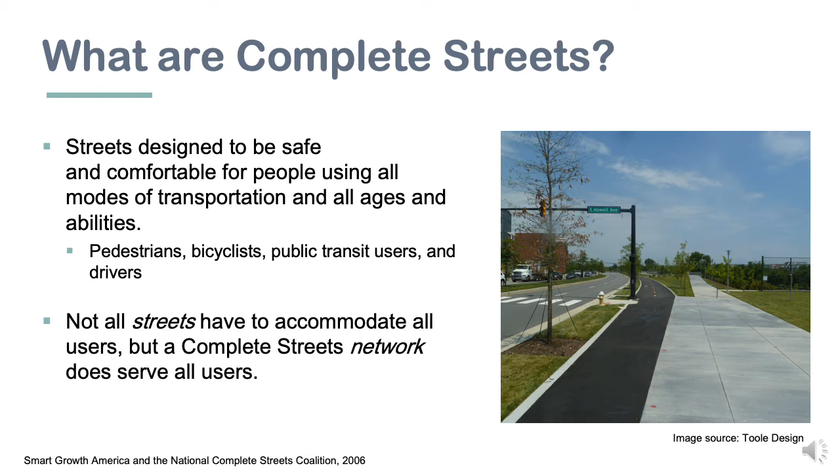Towns, cities, regions, and states make formal commitments to complete streets through adopted complete streets policies. These documents typically include many, if not all, of the 10 sections recommended by the National Complete Streets Coalition. There are at least 10 municipal policies in Connecticut and a state law and ConnDOT policy committing the state to a complete streets approach. Toole Design and FHI have recently worked with the Capital Region Council of Governments on crafting a policy for the Hartford region.

Since the concept of complete streets was coined about 20 years ago, there have been over 1,400 complete streets policies adopted or approved nationwide.

So complete streets include pedestrian improvements like sidewalks, crosswalks, curb extensions, and curb ramps that help people with disabilities navigate the street. They include improvements for riding a bike, like bike paths and bike lanes, and they can include improvements for transit, such as bus stops and shelters. Strategies for implementing complete streets include new construction, traffic calming, and travel lane reconfiguration, which is sometimes referred to as a road diet.

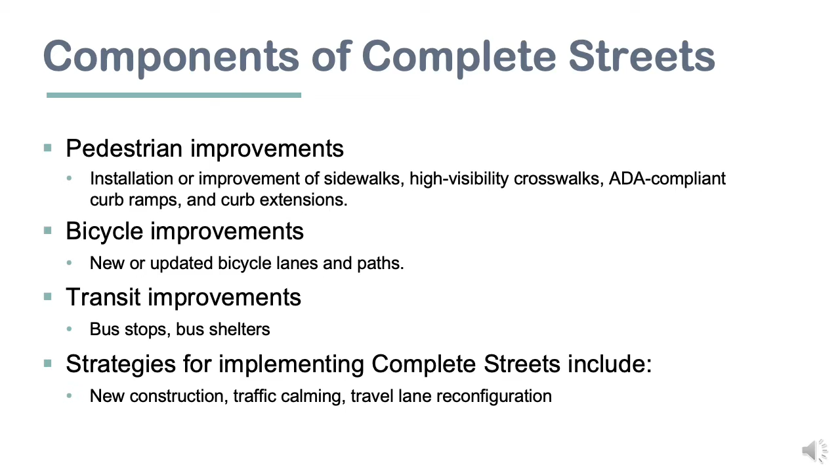This is a street in Swansea, South Carolina, population 827. At this point, the group in attendance offered their ideas on how the street could be designed to feel more complete. So this is the before image. And here's a rendering that we did for the street. It includes many of the ideas the group thought of, like new street trees, curb extensions, and wider sidewalks, while retaining on-street parking. The design intends to make the street comfortable and accessible for people, no matter what mode of transportation they choose.

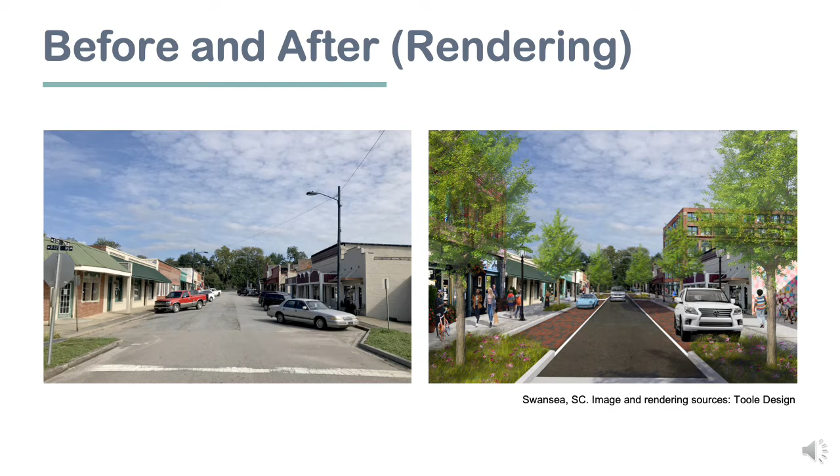So complete streets can help address public health and traffic safety issues in rural areas. Compared to the general population, the population in rural areas is older and has higher rates of physical inactivity, obesity, and diabetes. And rural areas experience fatal traffic crash rates that are disproportionately high relative to population.

Complete streets contribute to positive economic outcomes for rural communities. They expand travel choices, make it easier to spend less on transportation, and tend to have a positive effect on property values. Part of the draw of vibrant, traditional main streets in town and village centers is that they are complete streets. These are the kinds of streets that attract investment and visitors who spend money at local businesses.

Trails for people to walk and bike can draw visitors from around the region and even around the country. Those visiting overnight, usually using longer trails or trail systems, spend significant amounts on hotels and food and other items. This creates stable jobs in rural communities.

We can build complete streets that are sensitive to a rural context, considering surrounding land uses, travel needs of residents and other users, and other factors. You can adopt any number of complete streets design approaches depending on context, with a few basic examples shown here.

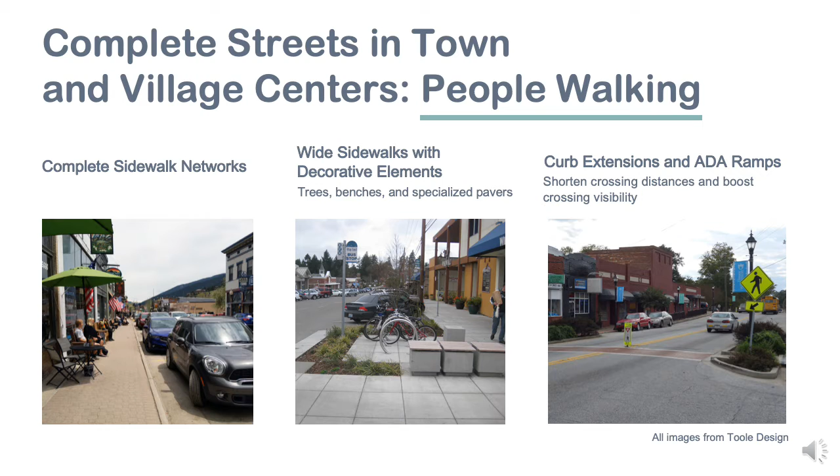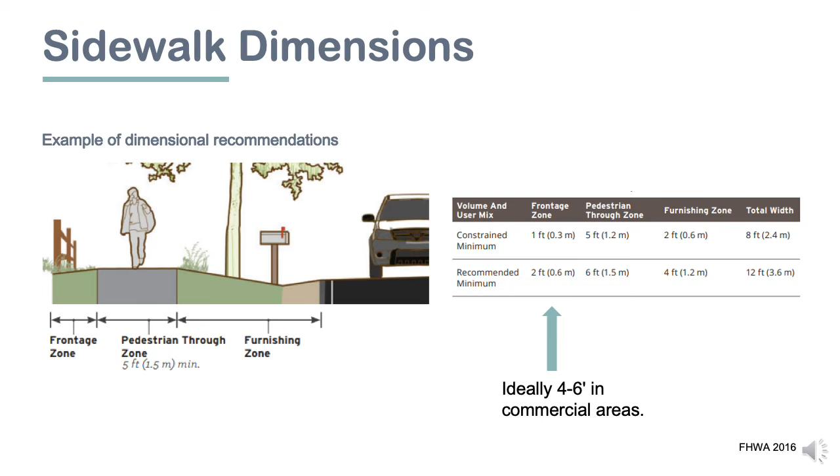Sidewalks are the basic building block of pedestrian comfort and safety. On this slide, you can see an example of dimensional recommendations for the pedestrian realm. Wide sidewalks, frontage zones, and furnishing zones provide increased comfort to users, and these are especially important and should widen in commercial retail areas.

So what about crossing the street? Well, high visibility crosswalks make it easier for drivers to see people crossing. Raised crossings also improve visibility while slowing speed, and curb extensions shorten crossing distances, reducing exposure time in the street.

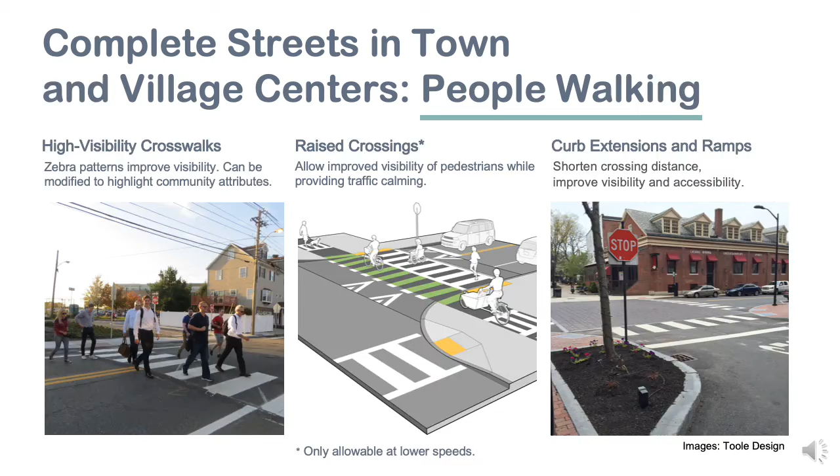When designing roads and streets that are welcoming for people to ride a bike, know that each street is different and has its own unique context. There may not be a perfect facility design, but by considering the factors shown here, among others, you can narrow down the range of potential options.

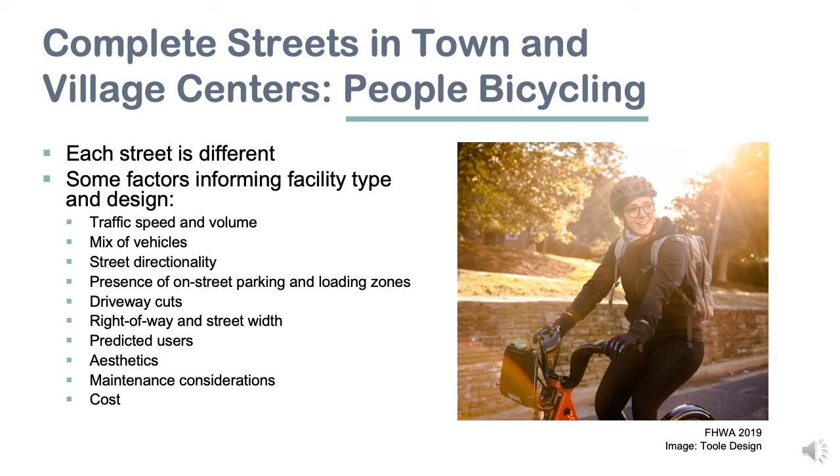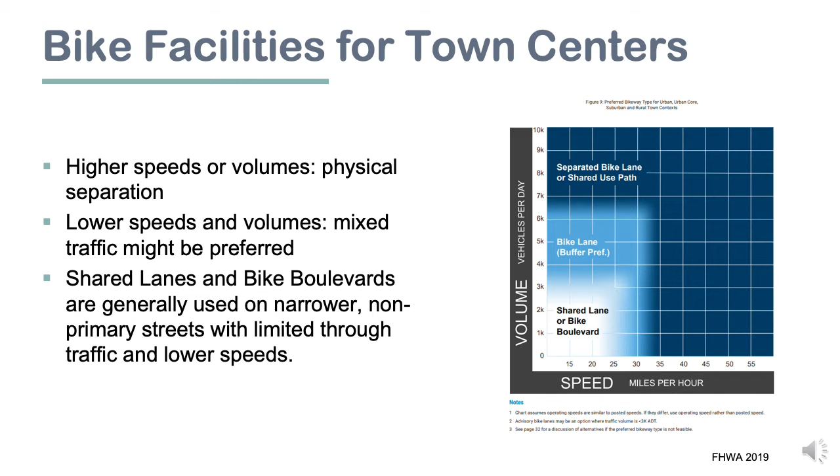A general principle to follow for all contexts, including rural town contexts, is to physically separate bike facilities from motor vehicle traffic at higher speeds or volumes. At lower speeds and volumes, people on bikes mixing with traffic might be preferred.

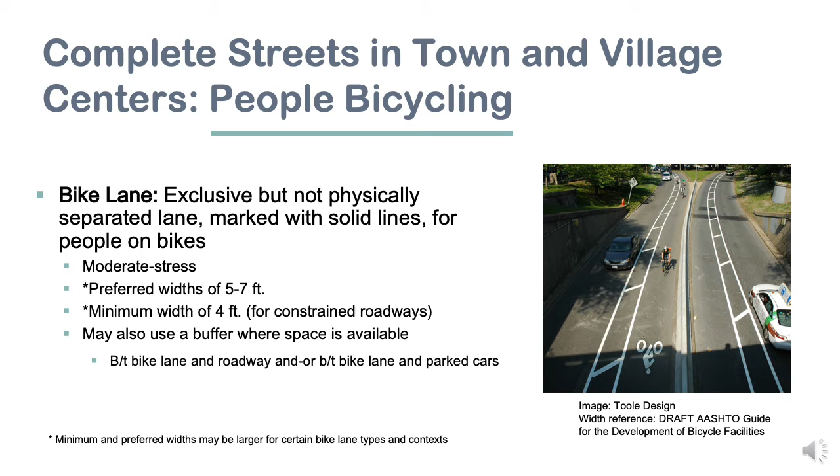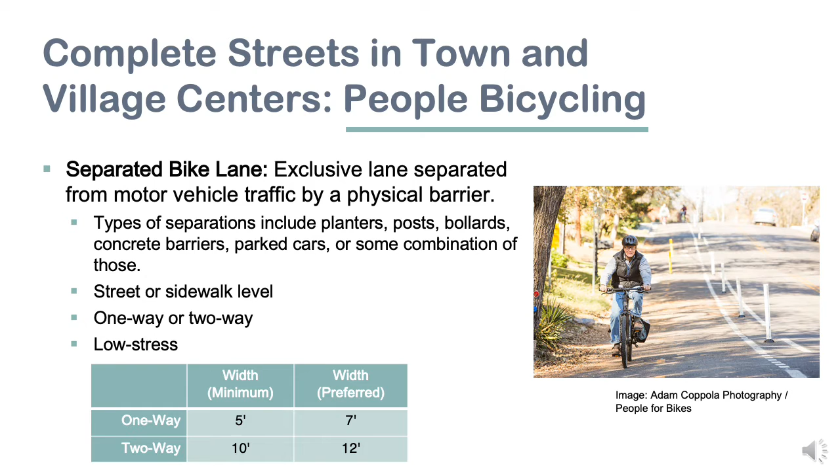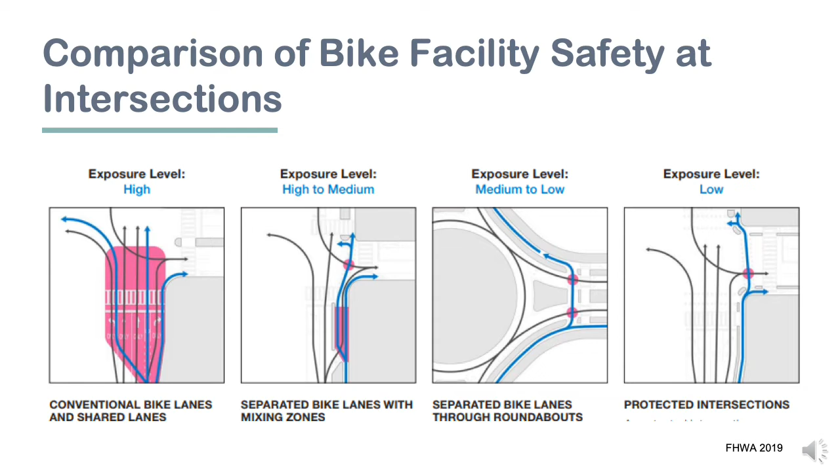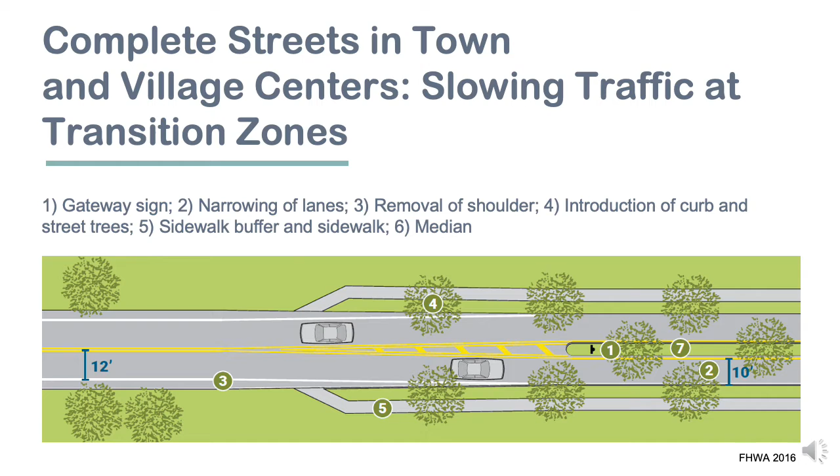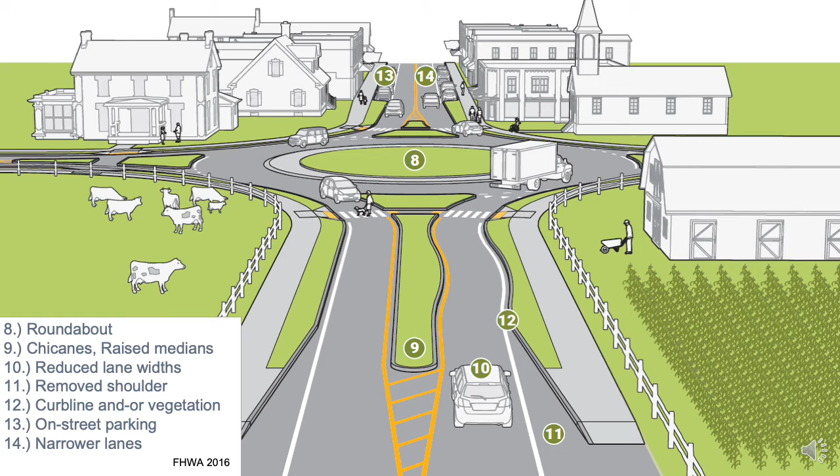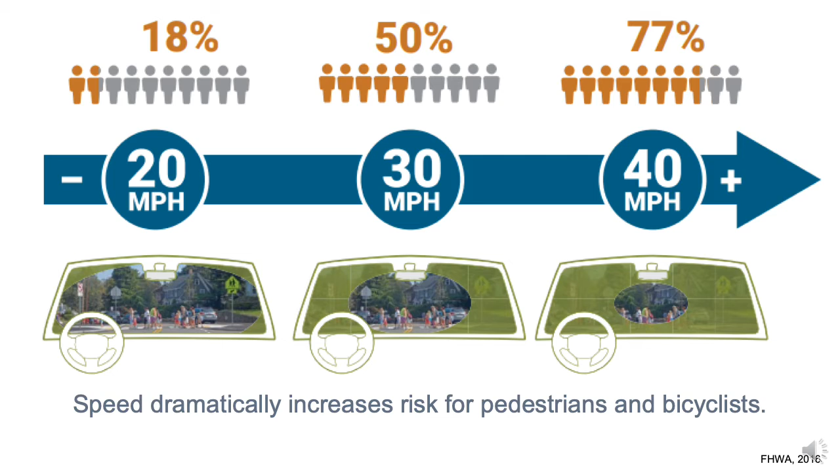Speed reduction is so important because the higher a driver's speed at the time of a collision with a pedestrian, the pedestrian has an exponentially higher chance of dying from the collision. When you drive at lower speeds, you also have a wider cone of vision to be aware of what's going on in front of you and along the side of the street.

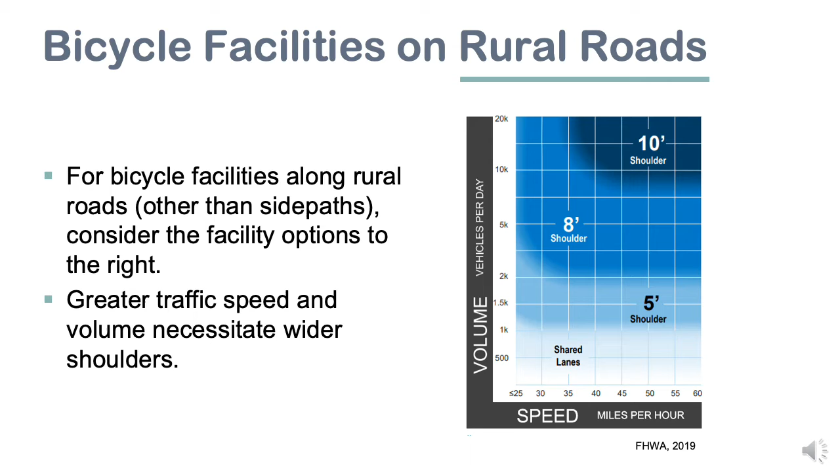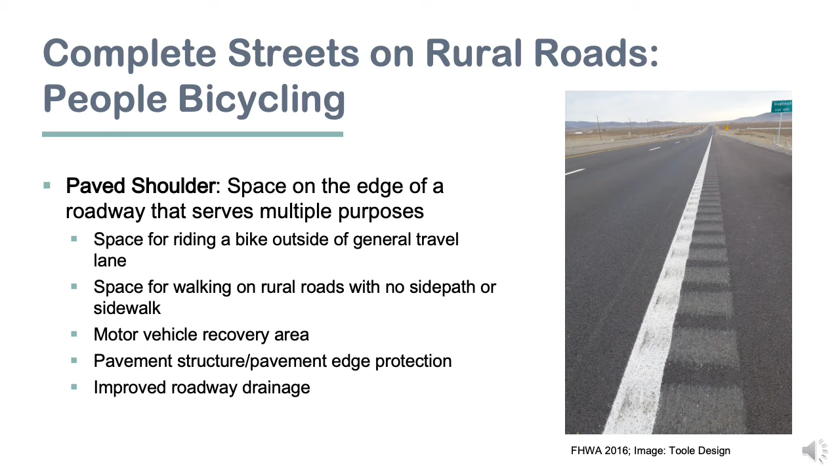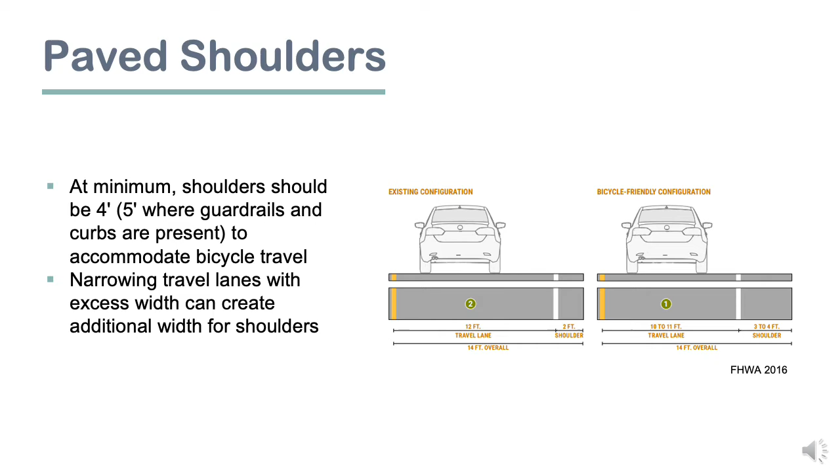Paved shoulders serve multiple purposes, including providing space for riding a bike and walking on rural roads without side paths, and serving as a recovery area for errant motor vehicles. At minimum, shoulders should be 4 to 5 feet to accommodate bicycle travel. If travel lanes have excess width, narrowing them can enable more space for the shoulder.

Trails are a familiar feature in Northwest Connecticut, and NHCOG has great information and maps on its website, so I don't need to say a lot here.

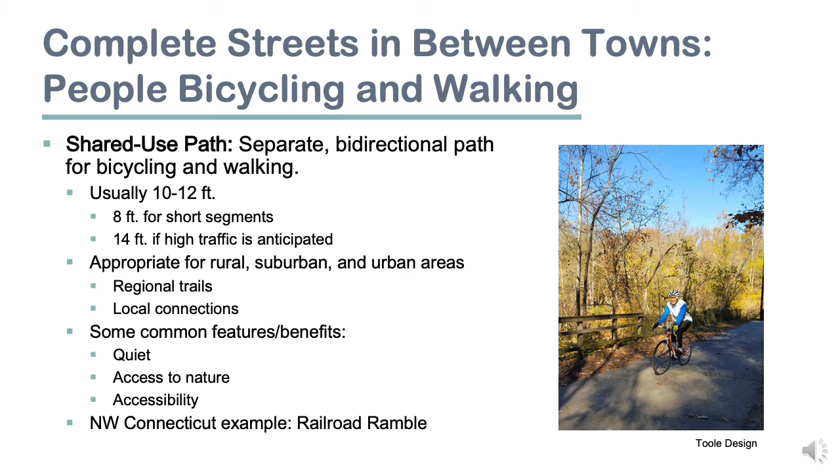Shared use paths are trails that are typically paved with asphalt or concrete or have surfaces such as gravel or stone dust. They are great for all types of communities, from rural to urban, with longer regional trails sometimes passing through multiple land use contexts. Trails tend to be popular because they are quiet, often accessible and usable for people of all ages and abilities. They often provide access to nature, they're free of motor vehicle traffic, and they provide an overall comfortable walking and bicycling experience.

Side paths are shared use paths built within the right-of-way, again providing a comfortable and low-stress walking or cycling experience for all ages and abilities, even on higher speed or volume roads due to their separation from traffic.

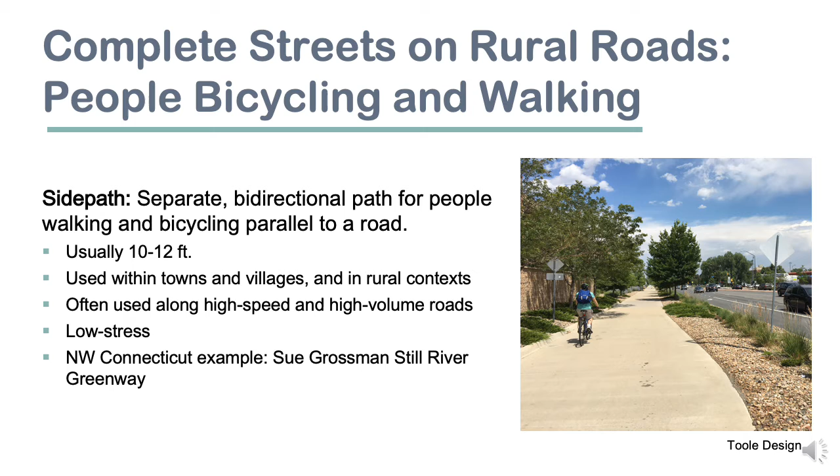Side paths should be separated from the adjacent road, ideally by 6.5 feet or more. Landscaping and trees can provide a greater feeling of separation while helping maintain a rural character.

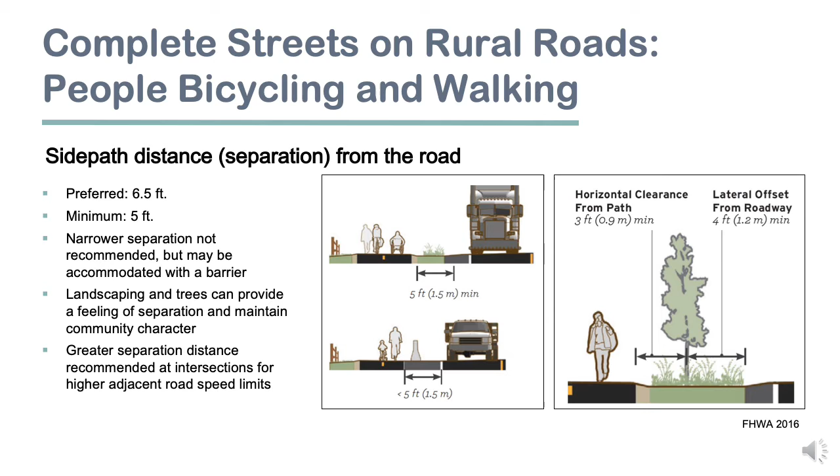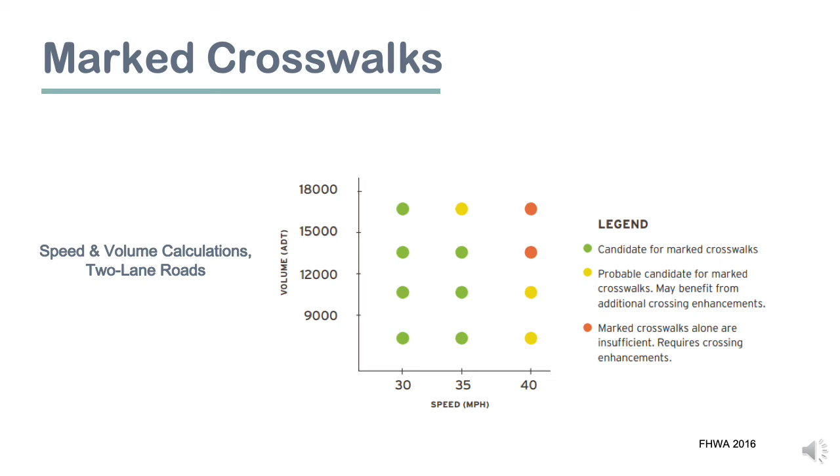Pedestrian crossing islands provide physical separation and refuge at the midpoint of a crosswalk, allowing for people to cross in two stages. They are a proven safety countermeasure and a potential strategy for enhancing crosswalks and shared use path crossings.

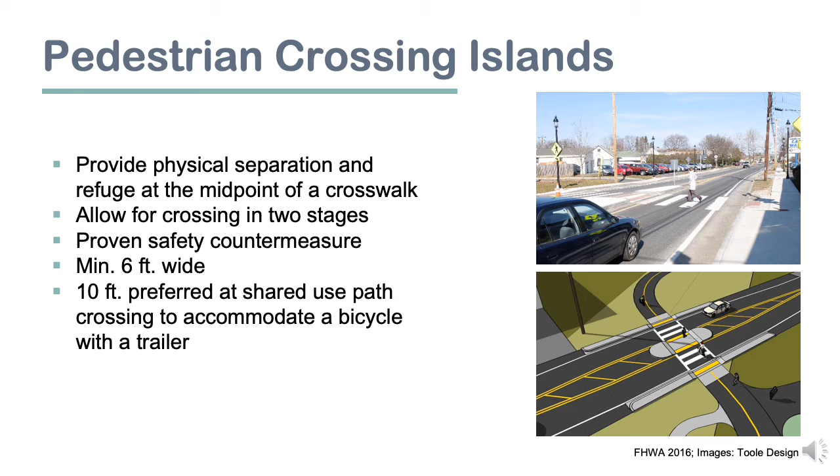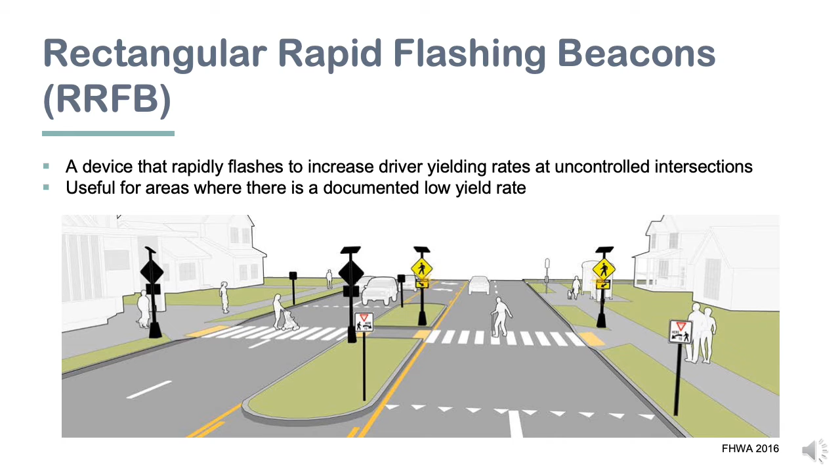Another option is the rectangular rapid flashing beacon, or RRFB, which is a device that accompanies the crosswalk sign and rapidly flashes to increase driver yielding rates at uncontrolled intersections. It's useful for crossings in areas where there is a documented low yielding rate for motor vehicles yielding to pedestrians.

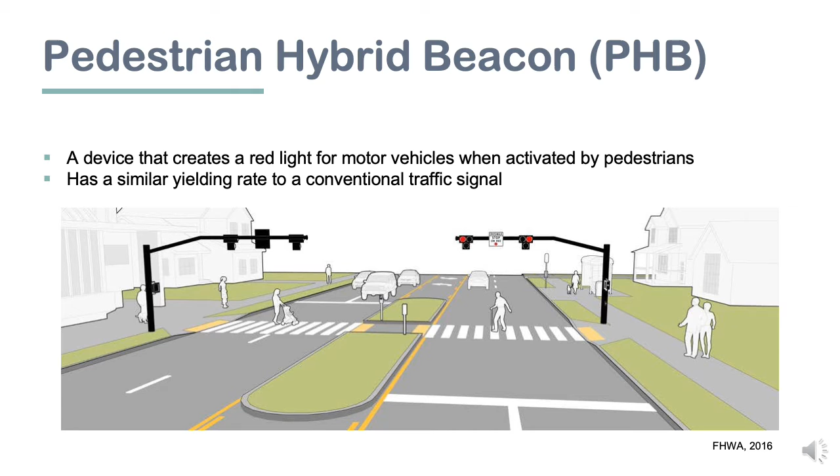For higher volume street or trail crossings, pedestrian hybrid beacons can be used to create a regulatory stop. They flash a red light for motor vehicles when activated by a pedestrian.

I would be remiss if I didn't mention wayfinding. It's so important for assisting people to navigate onto and off of trails and to navigate to destinations. It provides simple, concise messages to help people understand where they are relative to landmarks and popular destinations, and also creates a sense of identity for the community.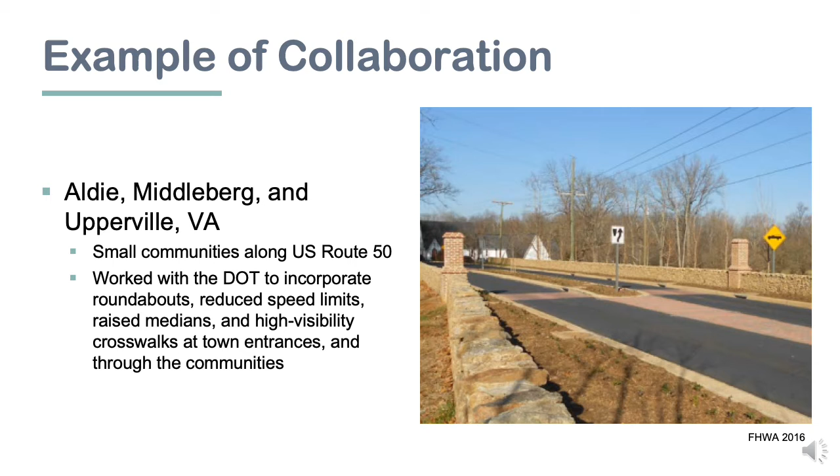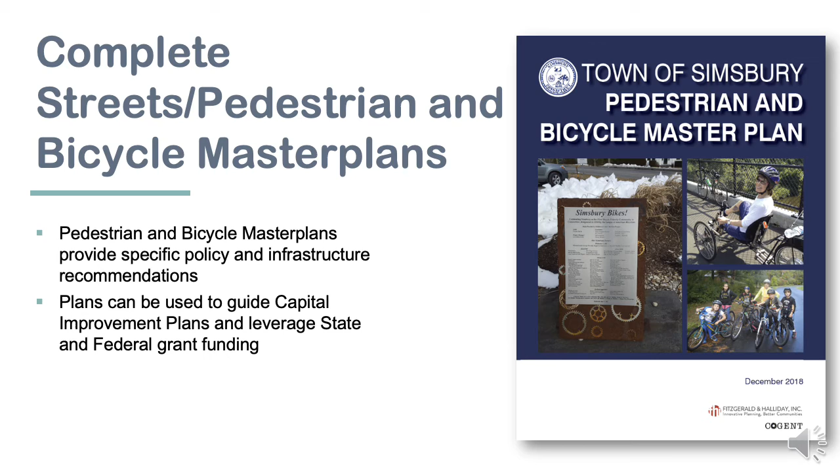What preceded the work that we did in Simsbury was the adoption of a complete streets resolution by the town. That resolution set forth in motion the work we did in the bicycle and pedestrian master plan, and provided some guidance as to how the town should go about planning for the maintenance and management of its transportation infrastructure.

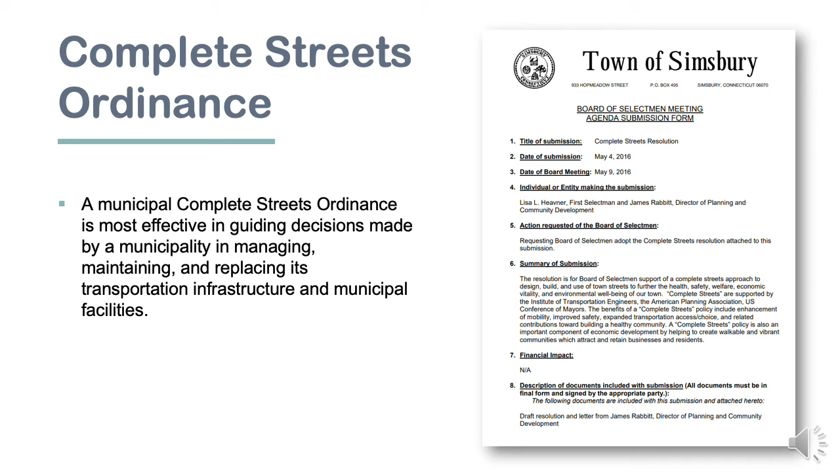In addition to complete streets policies, any community's zoning, design guidelines, or subdivision regulations provide an opportunity to provide regulations that encourage or require complete streets elements.

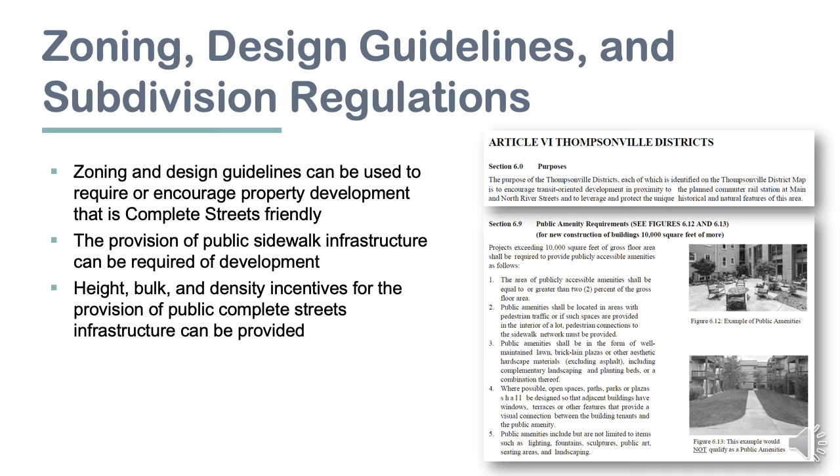Now I'd like to profile some examples of our work in smaller communities in both rural and kind of rural suburban contexts, the first one being Branchville Village in Ridgefield.

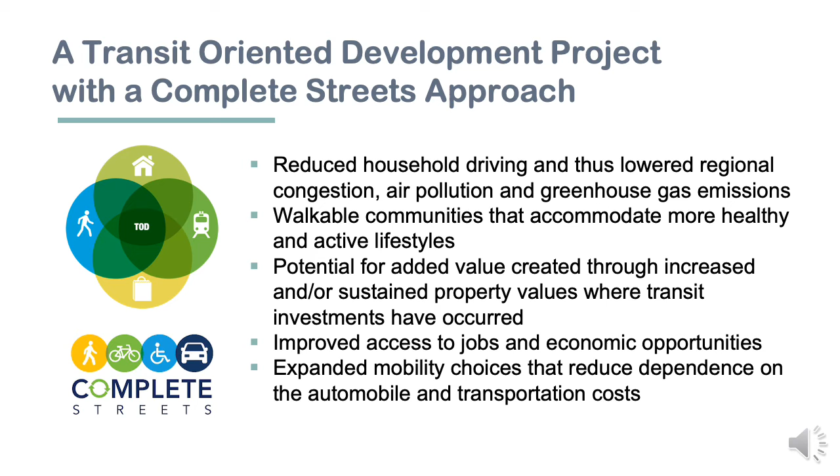The project had its origins as a transit-oriented development project, but we really took a complete streets approach, because that was the most noticeable aspect that would benefit transit use: providing much more robust pedestrian amenities throughout the village center. But there were additional goals of transit-oriented development: increasing transit use, stimulating economic development, improving air quality, and reducing traffic congestion. Complete streets play a role in all of this.

We started the project by establishing a vision, and within that vision, a well-connected pedestrian environment was really central to the concept. A little bit about the transportation network in Branchville.

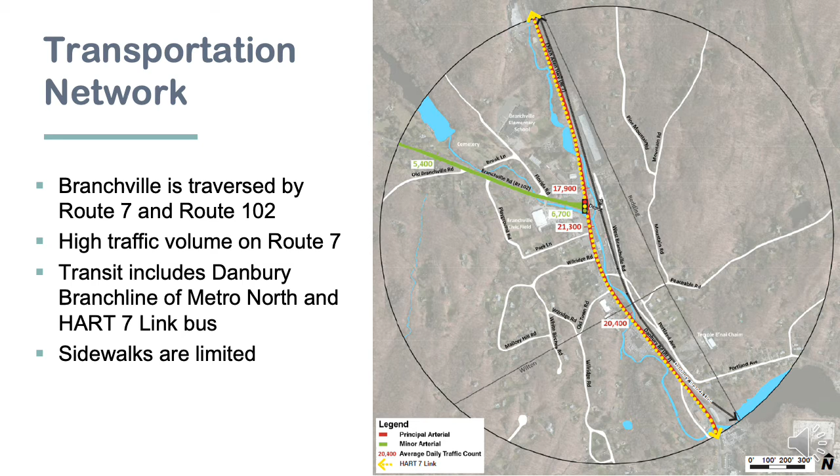It's the intersection of two state routes, 102 and Route 7. Route 7 carries more than 20,000 vehicles a day, Route 102 slightly less, 5,000 to 6,000. There's also the Danbury Branch train line running on the east side of the Norwalk River and the east side of Route 7. The area is also served by a bus. The headways are pretty far apart, but the HART 7 Link does travel north-south along Route 7 with a stop in Branchville.

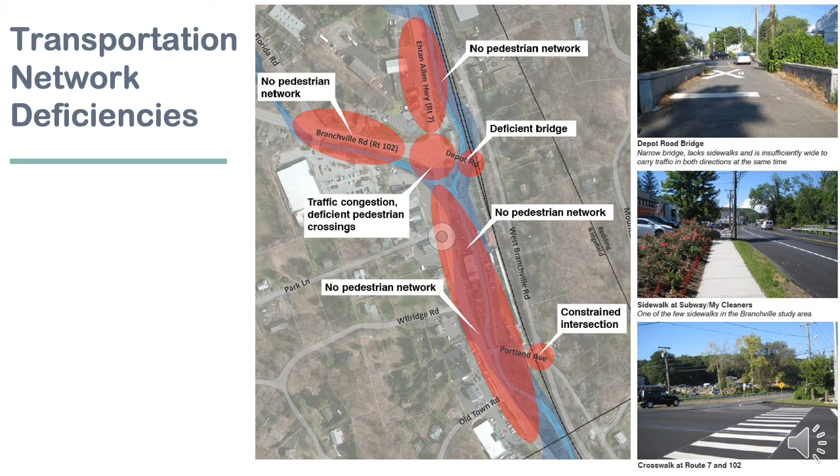Looking at the pedestrian and transportation network, we noted very quickly a lot of deficiencies. There were intersections that needed improvement, a lack of pedestrian network, and some old bridges needing work that did not have sidewalks. So a range of improvements were concentrated in proximity to the train station.

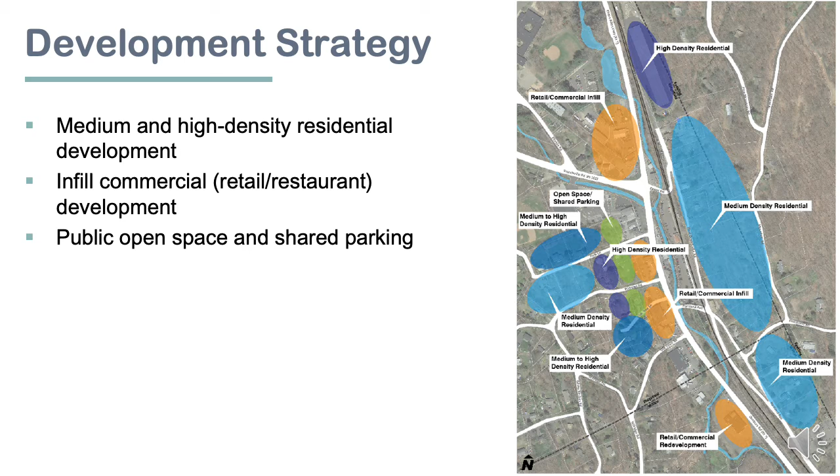We also provided the town with a development strategy—that's the development part of transit-oriented development. That included medium density residential, infill commercial, and mixed-use retail with residential, along with some public open space. The residential development we envisioned was medium density townhouses and apartment buildings with high quality design, compatible with the architecture in the area.

It's really this level of density that makes it easier to support more robust pedestrian facilities. First, you can get the developer to build these things out as they develop the properties. Included within that vision was more infill commercial, retail, restaurant, and service-based development to activate the area and bring it back to life as a village center.

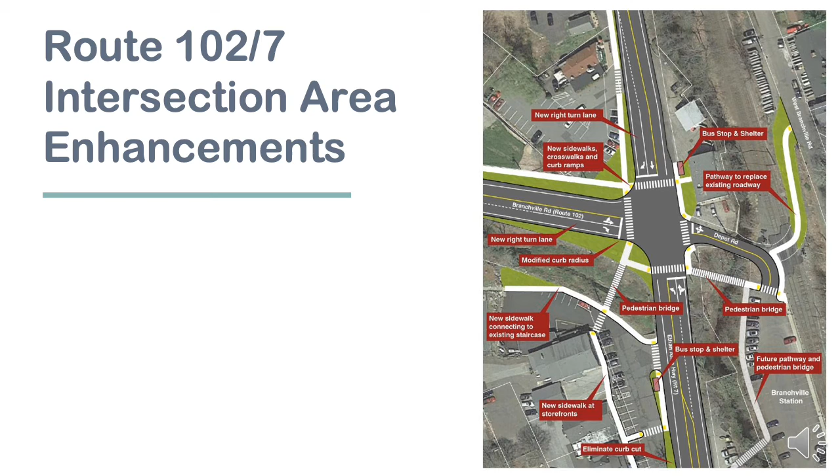The Route 102, Route 7 intersection was a big focus for us, as I mentioned earlier. We provided recommendations for far more complete pedestrian facilities in the area, including pedestrian bridges over the Norwalk River and some of its tributaries, sidewalks connecting to the train station and storefronts, shortened and more complete crossings at the intersection, along with a bus stop and bus shelter for the HART 7 Link.

This is a little further south in the project area, continuing those similar improvements down to the south side of the station, providing access to the station from the south as well.

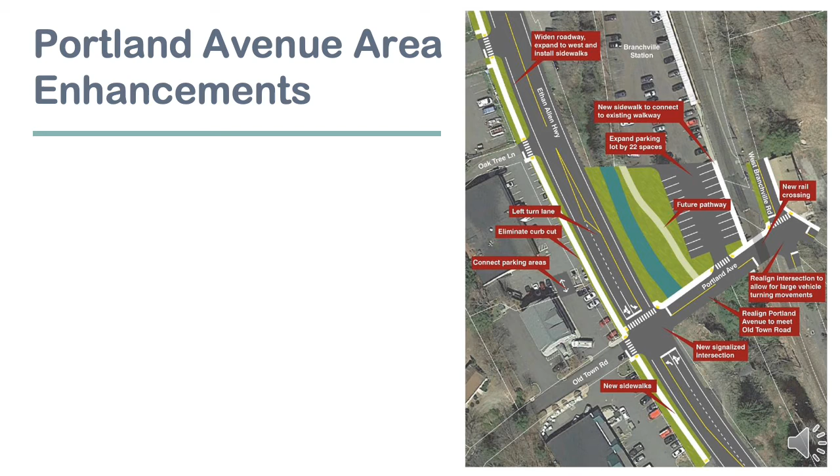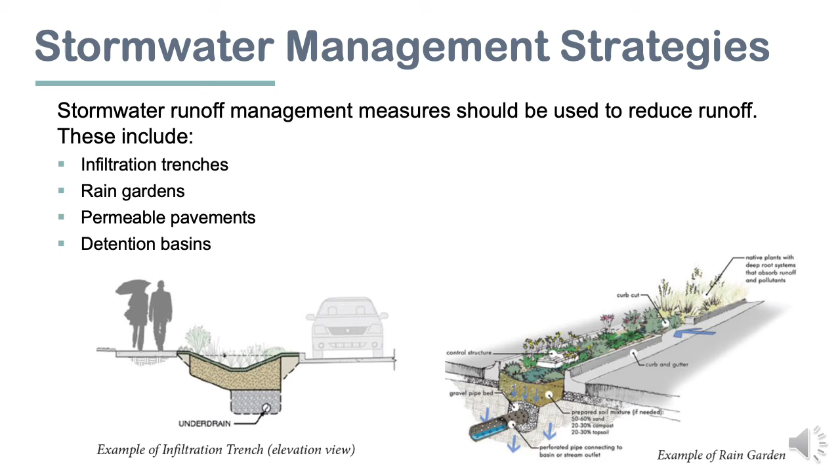Stormwater management is also a very important part of this equation, as it is an important part of complete streets. The town, like any other town in Connecticut, has a stormwater management plan and is under a mandate to reduce stormwater runoff and protect the water quality of the Norwalk River. One way to accomplish this is through infiltration trenches and rain gardens, as well as permeable pavements or detention basins, as a means of collecting and infiltrating water rather than shedding it directly into the Norwalk River.

What we envision and recommended through our work on the project includes sidewalks, infill development along those sidewalks, landscaping and street trees, pedestrian-scale lighting, maintaining a shoulder for cyclists, and providing a shoulder on the east side of the road as well. Eventually, when some property uses change in the area, we'd reclaim some public open space and provide a shared-use pathway on the east side of Route 7 along the river.

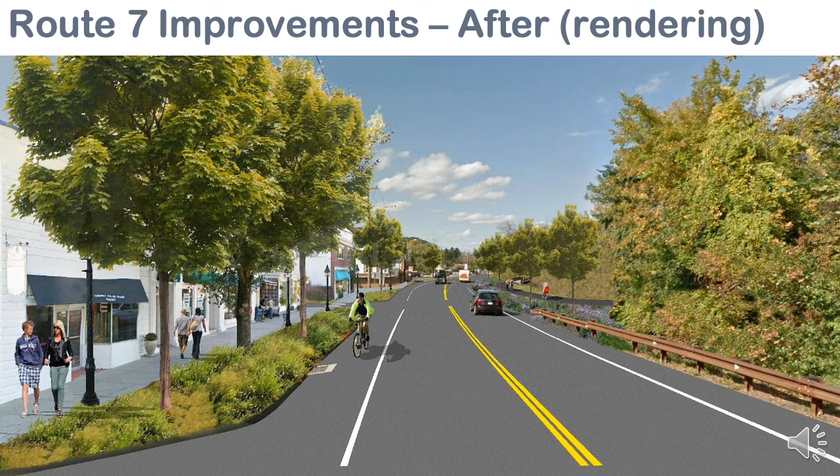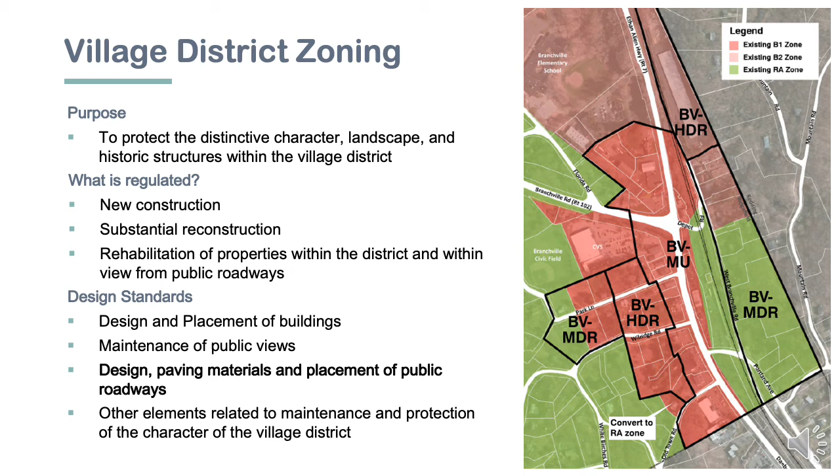Now, the policy tools we recommended to support all of this include rezoning the area. The town has yet to adopt that zoning—we finished the work a couple of years ago, and these things take a long time. But the zoning would allow the development as we show it, and would go further to require developers to build out some of that infrastructure along their properties and development.

The project has received over $6.5 million of funding via the local bridge program and state transportation alternatives program, and we worked with the town on some of those grant applications to help leverage that funding.

The sidewalk enhancements and pedestrian enhancements are now under design, as well as some bridge replacements now in design and engineering. We're working with one of the engineering teams to make sure the sidewalk network as built is aligned with the vision established in the transit-oriented development plan. Construction is anticipated to begin as early as next year.

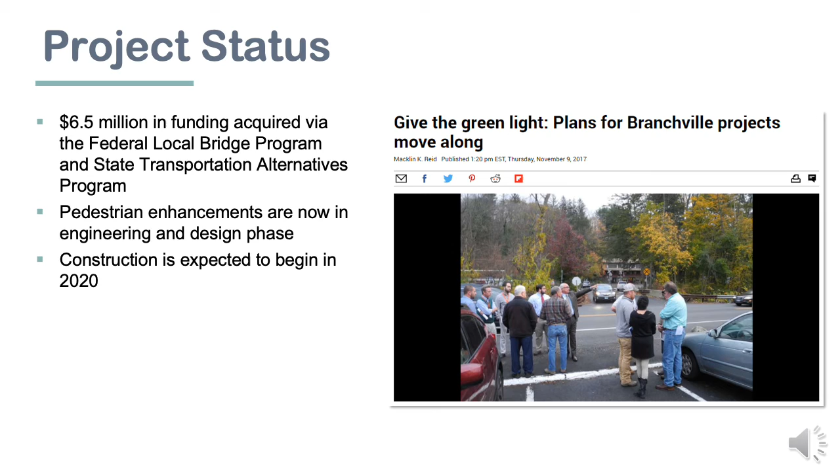Each one of those corners currently has a gas station, and we envision that's going to change over time, so we provide a vision for what that could look like. Transit is very limited here - there's no longer Metro-North. Once upon a time there was train service up to this area and there's a train station, but there is no service now, and there isn't really any other type of transit service in the area.

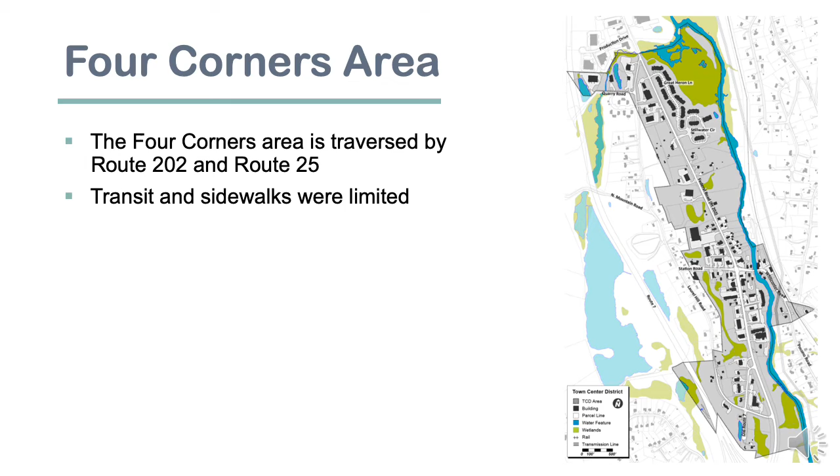A few images of what it looks like - sidewalks are extremely limited, just a few segments, so the network is not connected at all. Some property owners, in this case a florist, have taken the initiative to put out stepping stones for people. That shows there is demand and need, but the facilities aren't there.

The town did, however, require sidewalks of developers, and as you can see, there's a sidewalk leading to some townhouses that, unfortunately, when it arrives at the state highway, there are no facilities there to receive it.

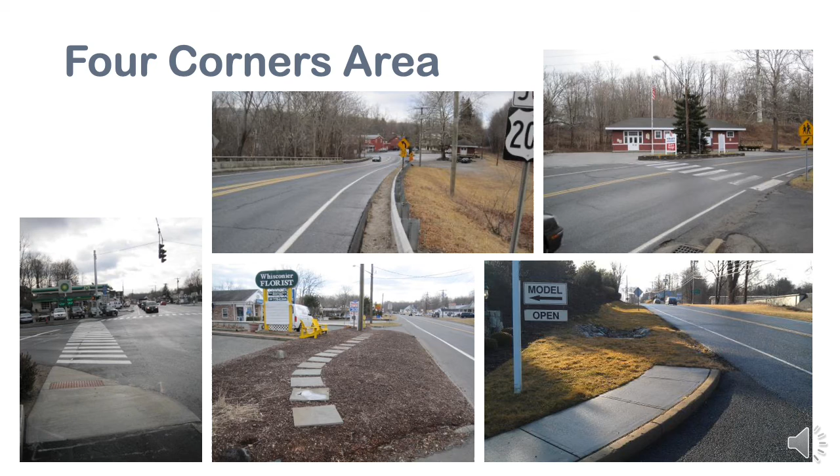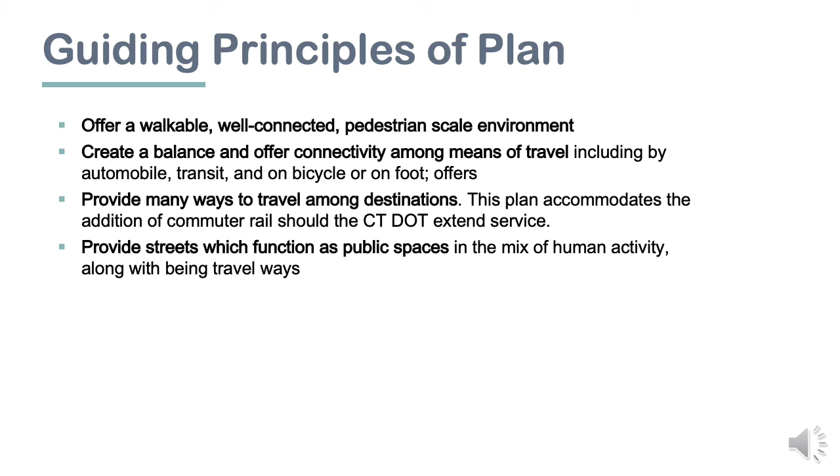Similar to Branchville, we developed a vision in this plan comprised of guiding principles, the primary of which was to provide a walkable, well-connected, pedestrian-scale environment, and to balance the transportation modes and provide functional open space as well.

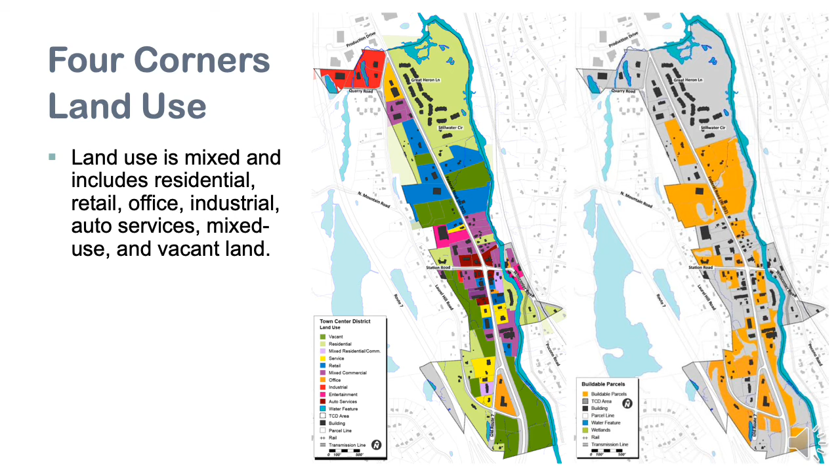Four Corners land use is really a mix of residential and commercial, as well as vacant land, which affords an opportunity for infill development. So we developed a development concept - an infill development concept - that in the bottom left corner envisions a future redevelopment of the gas stations.

The dotted lines and arrows all mean connections - the dotted lines are pedestrian connections throughout the area. So the vision is really quite comprehensive for infill development.

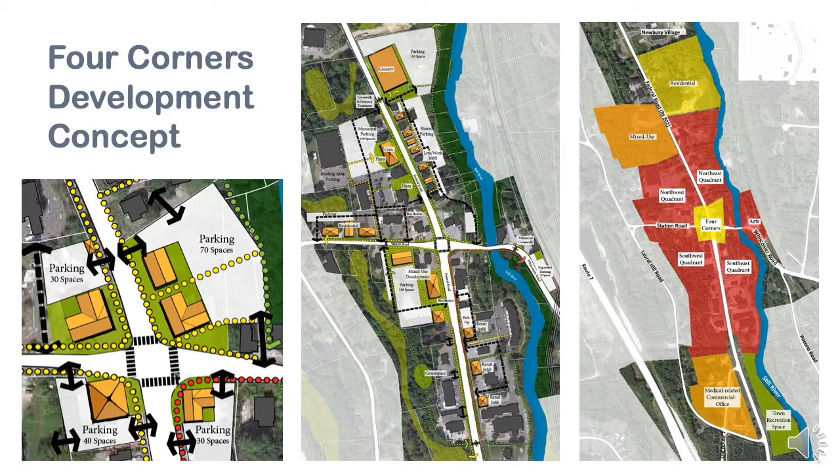As we were conducting a workshop for this, a developer approached us interested in doing a development similar to what I had on that slide - I'll get into that in a moment. But first, the most important aspect of this is really stitching together all that development by providing a well-connected, comfortable pedestrian environment.

This rendering really shows and demonstrates what that looks like and what it means. You can see very wide sidewalks, street trees, decorative pedestrian lighting, and on the east side of the roadway, a separated bike facility as well.

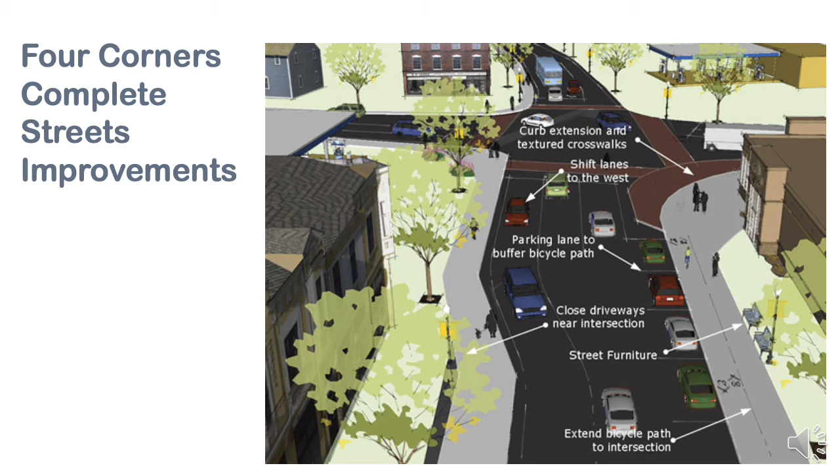The town is working to complete a greenway network with bike paths along the Still River here. So we're trying to accommodate bikes through this project area, off street and along the sidewalk in this example.

We also worked with the town to rewrite the zoning for the area to make all of this possible. The zoning requires buildings to be built up to the street line, requires pedestrian connections throughout, and seeks to push parking to the side and back, creating an environment where people park once and then make the rest of their trips on foot.

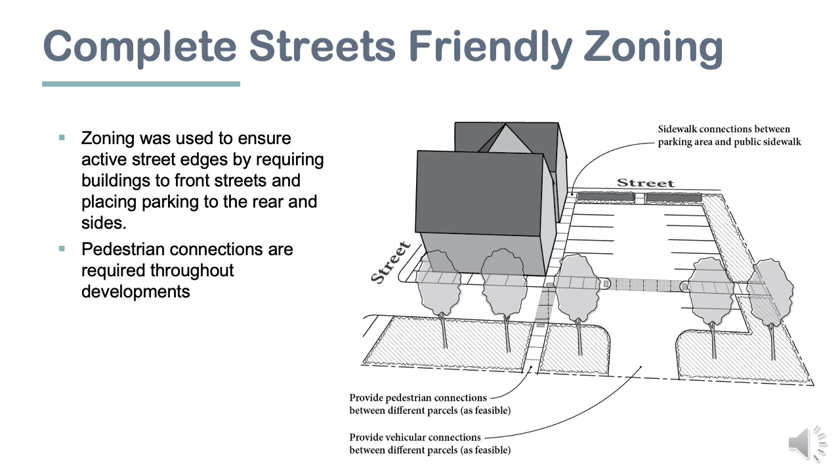That encourages people to get out, mix around, makes it a more lively environment, and really takes a few cars off the streets that would otherwise be circulating to park. A really important part of this is providing facade guidelines for the buildings and for commercial buildings and retailers.

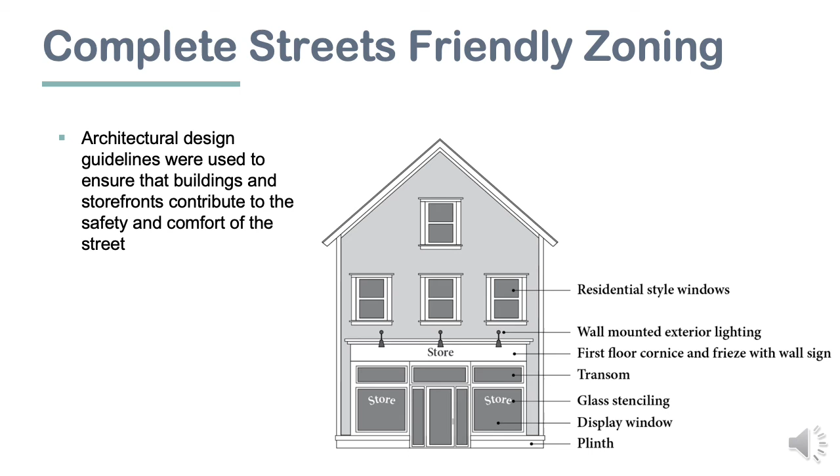These guidelines really try to ensure that the edge of the street, which is a really important part of complete streets, is active and vibrant and interesting. In this case, we have glass requirements so you can see into stores, and shopkeepers can see out. That improves the feeling and sense of security, along with some lighting requirements. All of that creates a far more engaging environment that feels a lot more secure.

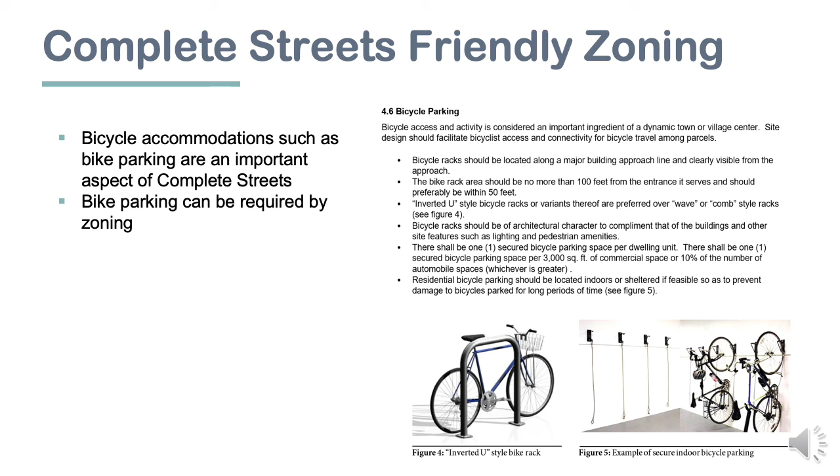In addition to that, bikes are an important part of this, and we provided bicycle parking requirements similar to car parking requirements, including indoor parking facilities for residential developments and outdoor parking along the street and sidewalks and parking areas as well.

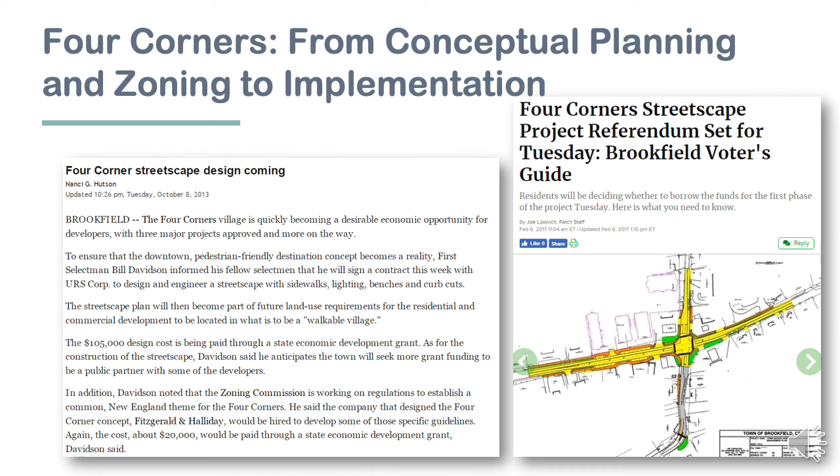The project has been moving forward very early on, shortly after our work, and this dates back to 2013 now. The town started working on design and engineering of the streetscape as we had envisioned it, and the voters and residents of the town got behind that with some funding, approving it at referendum. The work got started a few years ago, both the infrastructure aspects and the development.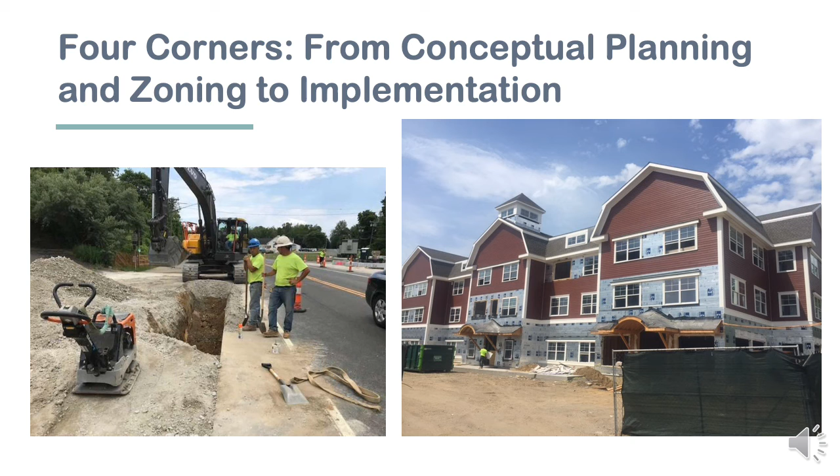The picture on the right is the developer that had come into our workshop. At that point, the developer was interested in doing a traditional suburban style CVS with parking in front. We showed the developer what was possible through the zoning we'd be writing, that he could do a lot more with the property. So what you see on the right is a development that's now more or less complete and includes upper floor residential, lower floor retail, and is built to the street front, pushing the parking to the side and back.

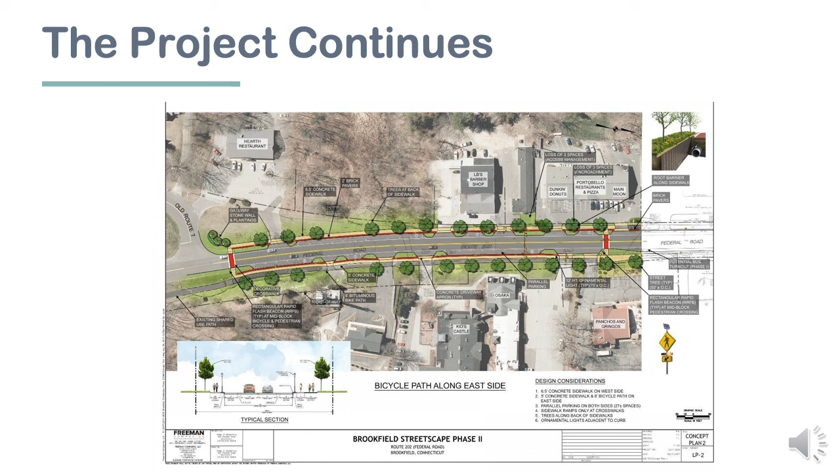And the project continues. It's under design and engineering right now to proceed further south, extending another quarter mile or so. That will create a really nice district that'll be a good place for people to walk and make some trips on foot.